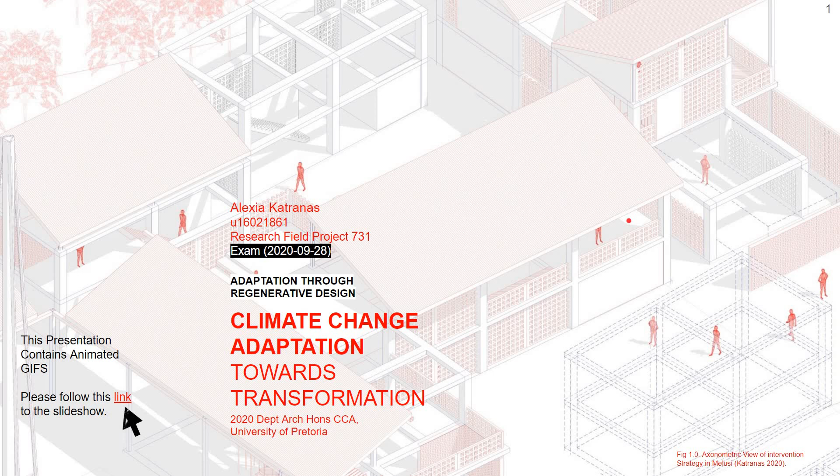I'm Alexia, and this project aims to interrogate whether architecture can serve the role of advocating agent, and thus catalyst, for transformation towards resilient systemic health and ultimately dignity in Melusi.

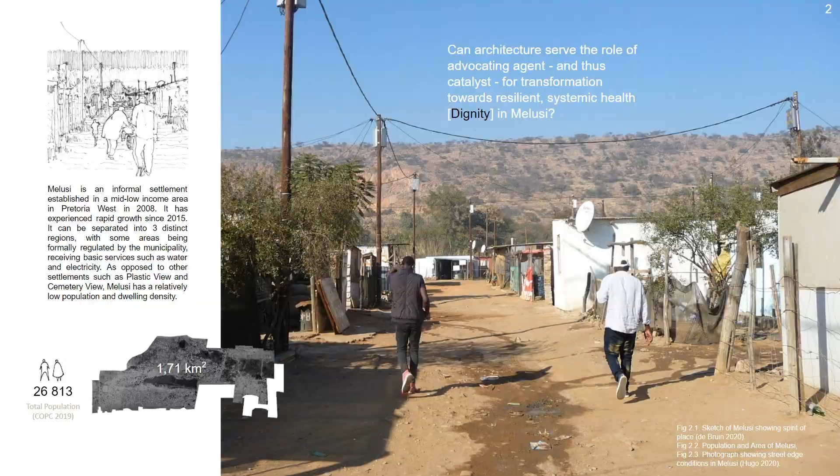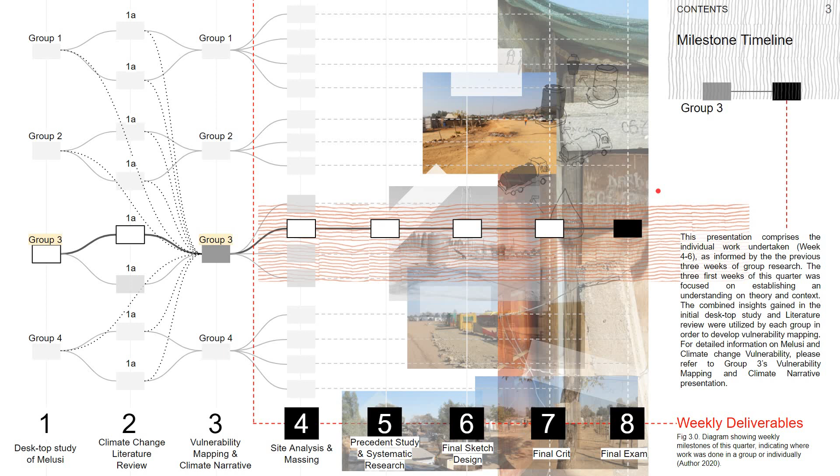This presentation comprises the individual work undertaken from week 4 to 6, as informed by the preceding 3 weeks of group research, of which I was in group 3. It is loosely structured as a narrative of the process undertaken, understood in terms of a theoretical framework, a contextual framework, the resulting spatial and systematic response, and the critical reflection.

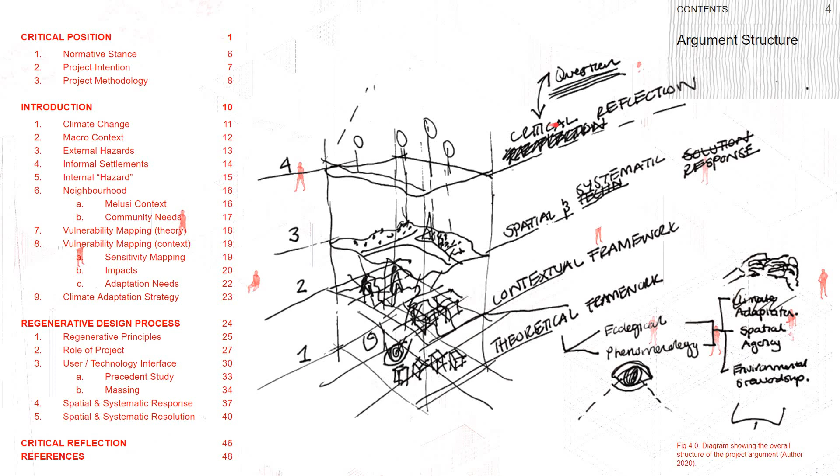The theoretical framework, first part, can be further split into the normative lens, such as an ecological or phenomenological paradigm, and the general knowledge or principles of climate change.

For now, we will begin with the critical position, which tells us that change begins with critically assessing how you see the world, in understanding your own role, and realizing that the importance of any system lies in its relationships, not our normative conceptions of static outcomes or objects.

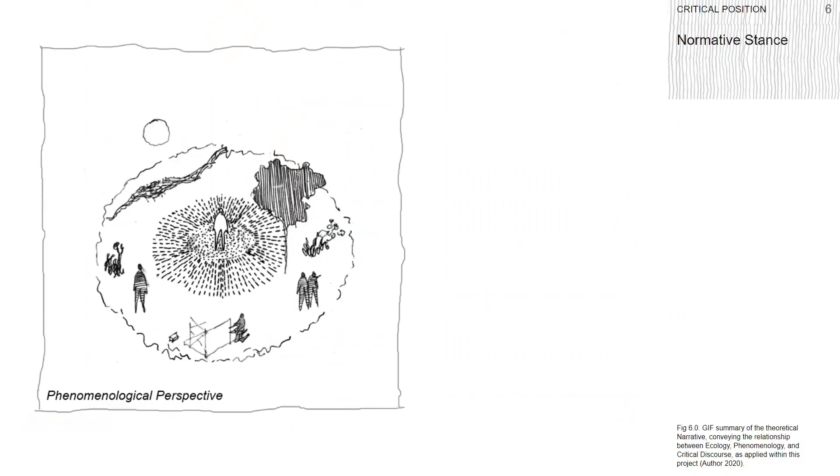In order to participate intentionally and beneficially, one needs to understand our living partnership with the world around us as relational and not transactional. This suggests that the way we should be approaching climate change problems is the same way we should be approaching so many other social and economic issues, as our fundamental conception of the relationship between what is inside versus what is outside of us, the other, is currently unhealthily fixated within the binary.

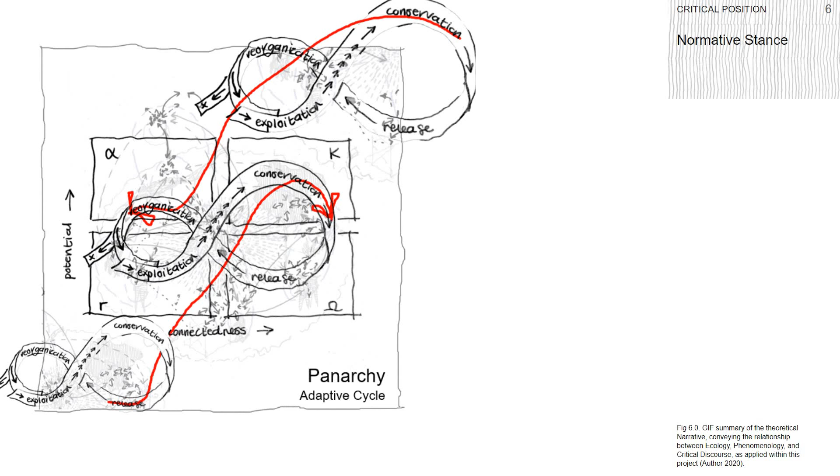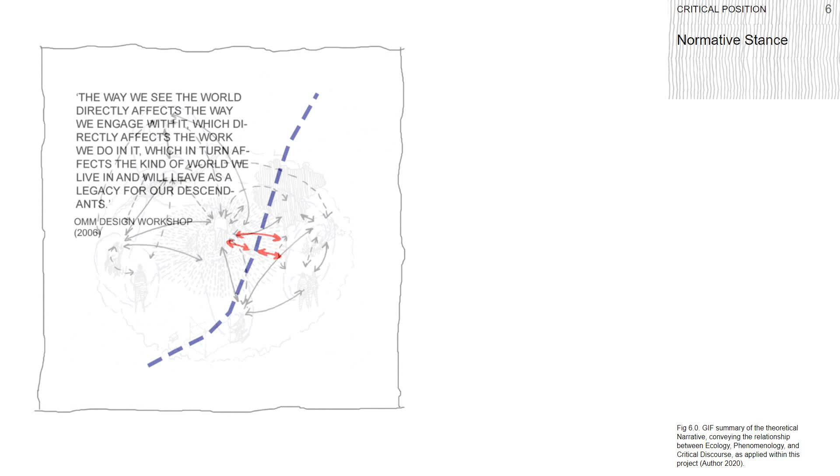Understanding place and its existing potential, whilst improving the value of existing systems, or manifesting, is a way to address climate change without imposing inappropriate technological systems in an effort to preserve current conditions against time's uncertainty.

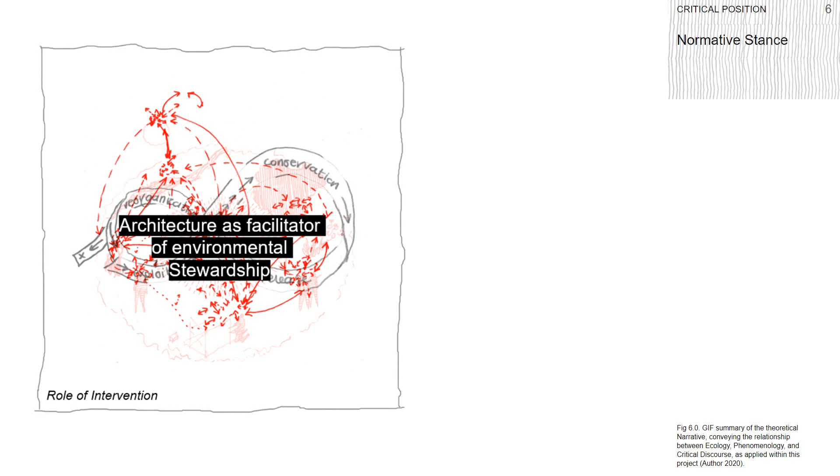This brings us full circle to how we see the world, and whether we impose change or strive to reconcile our relationship with it. In light of this, the intentions are as follows.

1. To explore climate change adaptation and regenerative design as a design generating method. 2. To showcase appropriate context-specific spatial and technological analysis and responses. And 3, to measure the potential of architecture as an advocating agent and catalyst for systemic transformation.

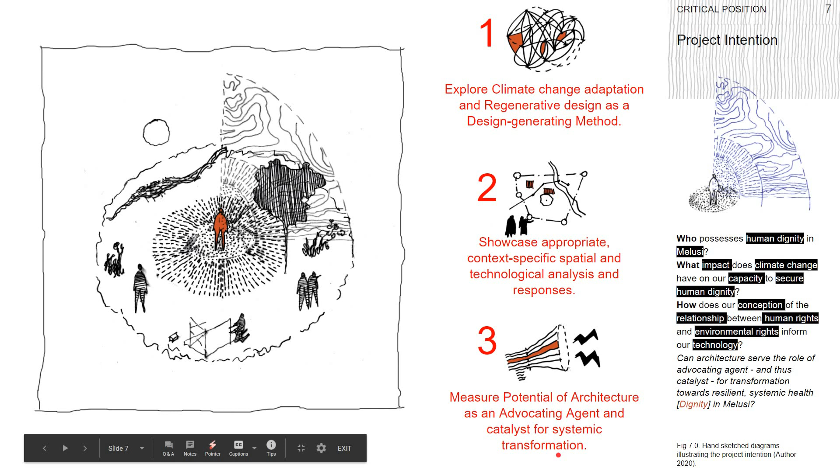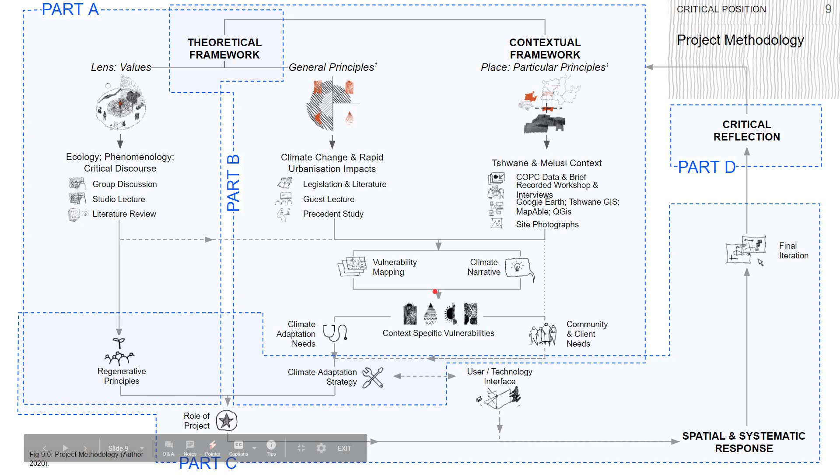In terms of methodology, the process, this following process was followed and will be further elaborated on during the remaining parts of the presentation, which is part B, C, and D.

In terms of part B, this section will introduce the remaining portion of the theoretical frameworks as well as the contextual frameworks, using this incremental sequence that was followed whilst undertaking the research.

The risks relating to climate change are as social as they are environmental, and essentially threaten our human dignity as well as other core human rights as upheld by our Constitution. This project will thus consider the important relationship between adaptation and human dignity going forward.

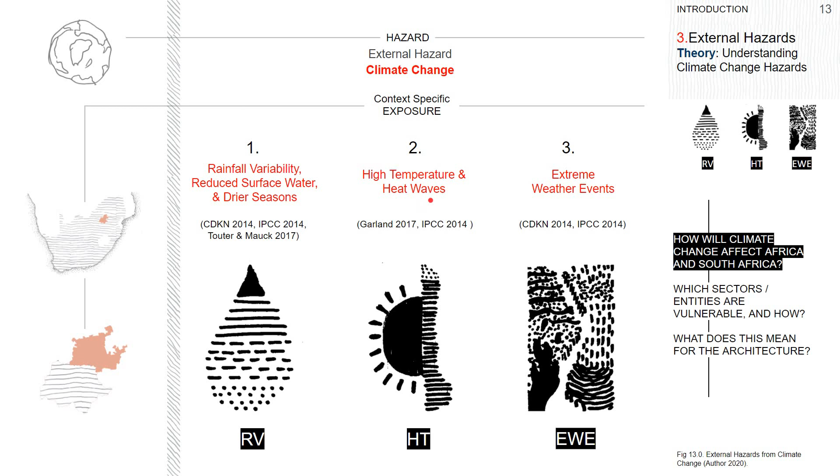It is also important to note that the research area, Melusi, is a sprawling informal neighborhood or settlement located to the west of Pretoria CBD in City of Tshwane Region 3. This exposes it to the climate hazards faced by Tshwane and the majority of South Africa, being rainfall variability, high temperatures, and extreme weather events.

Furthermore, Melusi is an informal settlement, and just as with other informal settlements studied within Pretoria this year, is undergoing rapid growth in light of increasing trends of urbanization.

Thus, informal settlements typically have a worrying social vulnerability index due to the existing infrastructural deficit. This is important because it increases Melusi's exposure to the identified climate change hazards previously mentioned, suggesting a need to provide basic infrastructure as part of climate adaptation measures.

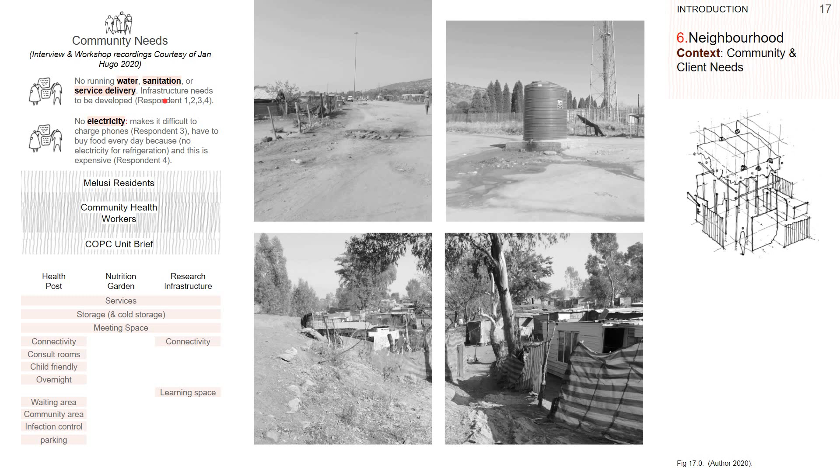It was then imperative that we undertook a vulnerability mapping exercise in order to understand the particular climate adaptation needs of Melusi.

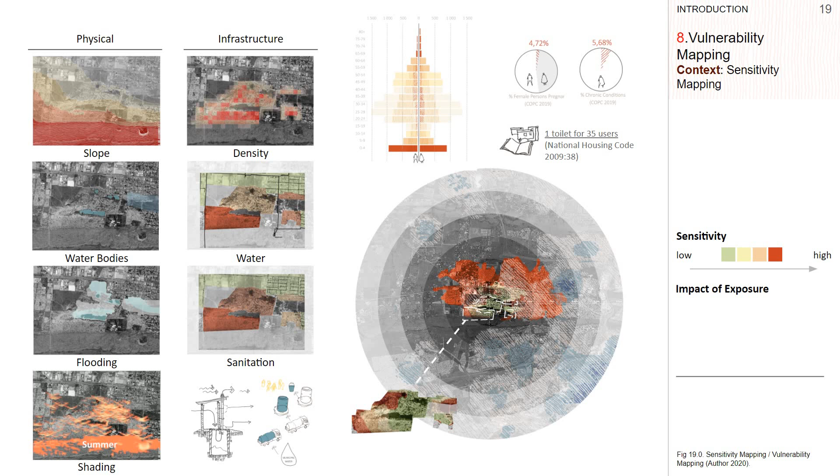This began with the group desktop mapping of existing sensitivities, which led to a greater understanding of the relationships between each sensitivity and impact. It also assisted in identifying existing leverage points that support successful contextual adaptation, the adaptive sensitivities.

This project will focus on addressing climate change sensitivity, human health issues, water shortage impacts, and infrastructural damage impacts by leveraging access to clean water, access to sanitation infrastructure, and healthcare through the provision of this infrastructure, but also its versatile and adaptive technology so that resilience can be fostered.

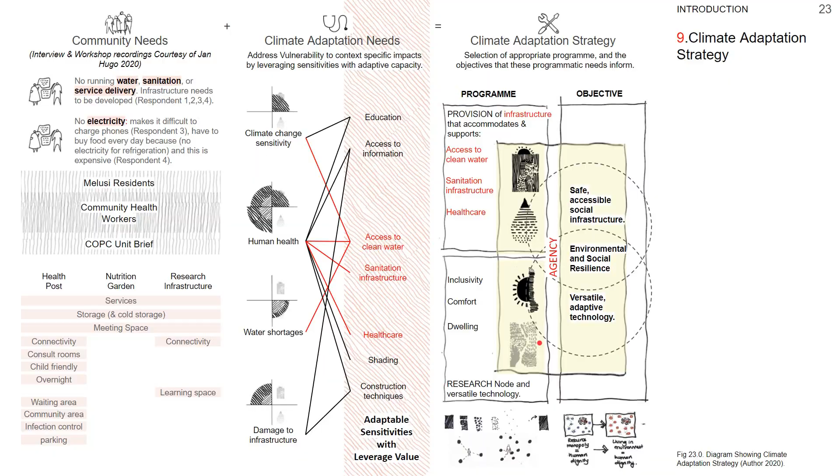Now, having identified the climate adaptation strategy out of the theoretical and contextual frameworks, this section, section C, will explore place on a site-specific scale in order to inform the role of the project and the user technology interface so that we may arrive at a spatial and systematic response.

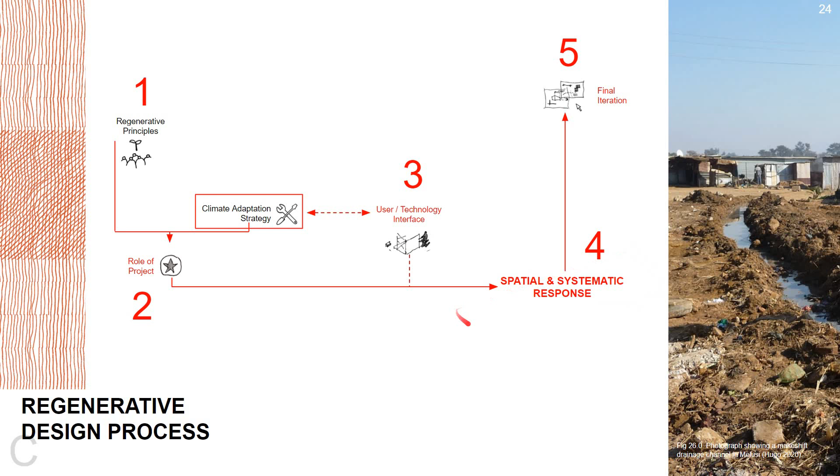This began with the site selection and analysis, which indicated a few things, specifically drainage issues due to deep dips in the topography and also it being at the foot of a ridge, the high velocity of rainwater surface runoff. It also indicated a need for additional shading, as well as an opportunity to define a more comfortable street edge condition. It's a very wide existing street.

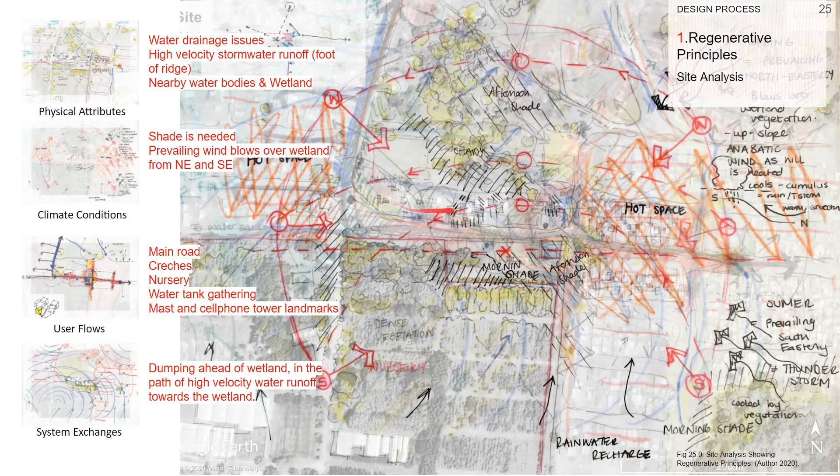The site sits on an important transport corridor for Melusi and thus serves a considerable portion of the people, specifically in terms of these more public programmed buildings over here, for example, the creches across the road.

Alongside interview data, which you can see over here, has informed the understanding of patterns of interaction, essence patterns told us that migration, informality, affordability, and simplicity are important patterns, as are community and unity. The essence pattern is defined or identified as stabilizing social network, this through the interview feedback, which indicated that people really support one another.

This supports the importance of architecture's role being that of a facilitator of systemic social change towards environmental stewardship, where architecture is the boundary condition or temporary nexus in the flow that reflects a positive ecological worldview.

In order to foster environmental stewardship, or to dwell, it is imperative that the response embodies the existing potential of Melusi. In order to catalyze systemic transformation, it is furthermore important that the architecture makes existing strong relational connections within Melusi visible.

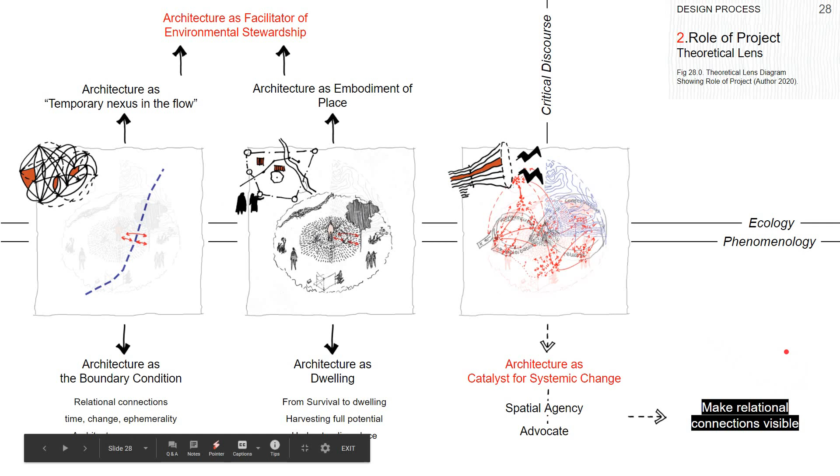This project thus has the opportunity to define a positive interface between the community needs, the clinic needs, and the climate adaptation needs, strengthened by a research and connectivity node.

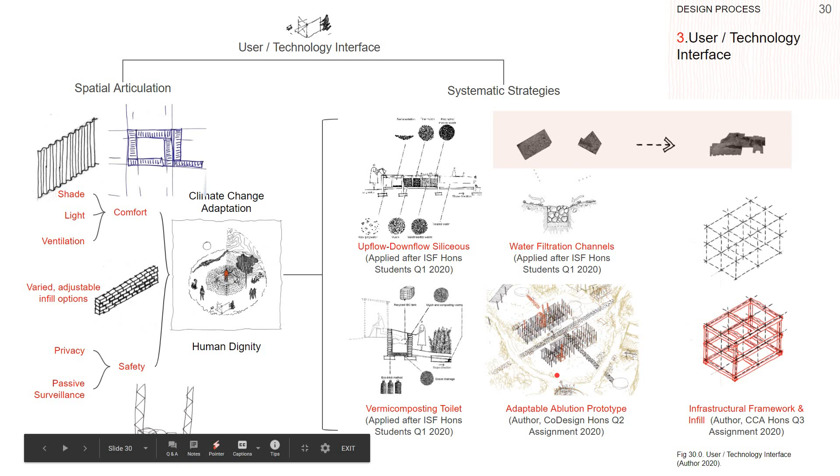There also exists the opportunity to apply strategies researched in quarter 1 and 2 within the context of Plastic View and Cemetery View that can be applied to Melusi.

In terms of sanitation, this would include the plugging in of vermicomposting sanitation approaches, which can be accommodated easily by the adaptable ablution prototype shown in this GIF that I worked on last quarter.

In terms of access to water, this would include rainwater collection, as well as grey water filtration using the upflow-downflow siliceous system, as well as introducing water filtration channels on the ground to mitigate existing drainage issues.

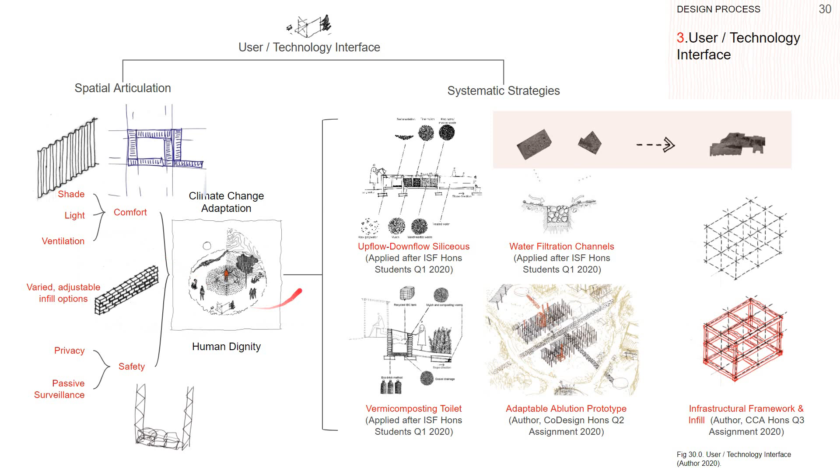It is also important to remember that in terms of climate change adaptation and human dignity, it's not only the provision of basic services that are important, but also the experience and the spatial conditions. So the approach also needs to take into consideration thermal comfort, as well as safety and belonging.

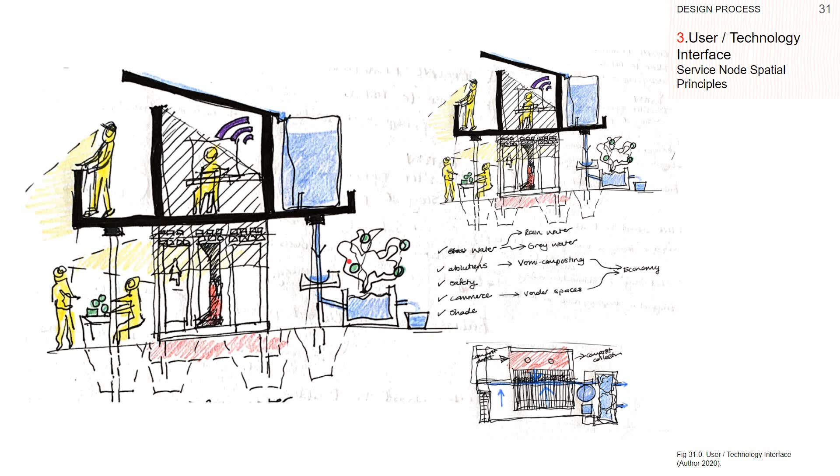Here's a preliminary spatial and systematic principle that was explored for a multi-service node.

In terms of further response to site conditions, an important consideration, once again, was the steep slopes, which will be made use of. It is suggested, furthermore, that an artificial wetland is implemented in this area as well to mitigate and slow down the surface runoff, which naturally collects there.

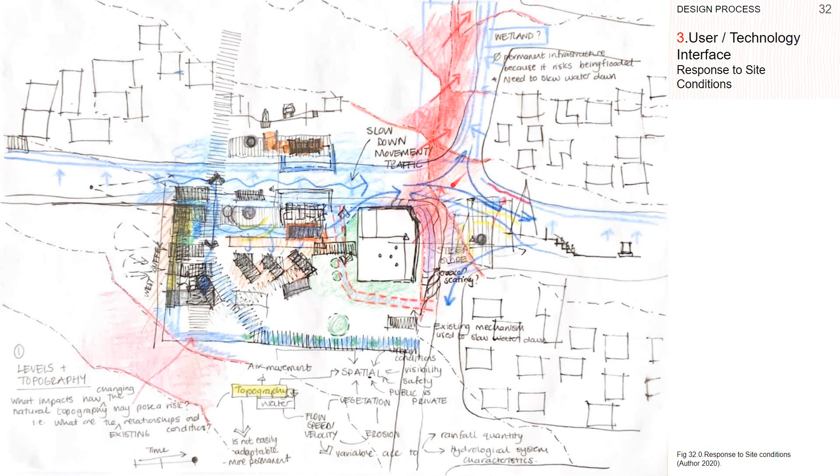In terms of a precedent study, Casahilo is a project which forms part of the Apan Housing Laboratory in Mexico, and it became a helpful construction informant because it also aims to facilitate incremental expansion through a modular framework and offers the opportunity for adaptable wall infill.

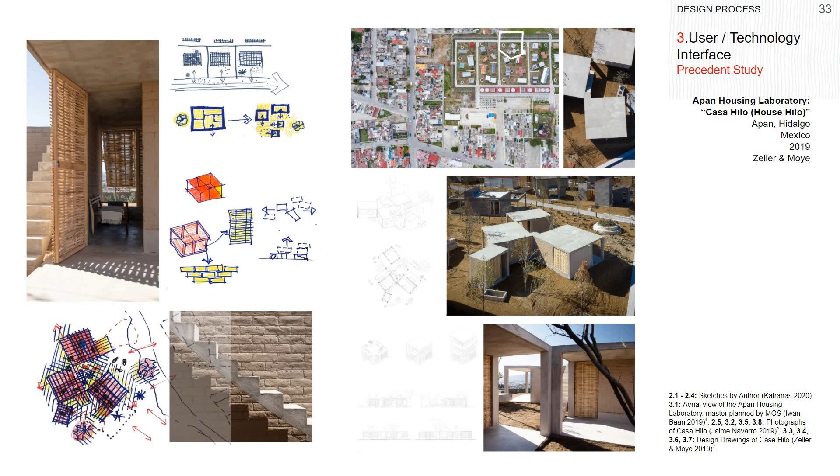Let's go to this next slide where we can see this is where the health node will sit, the research node, and the community node, which all function together in this way.

The ground floor accommodates the storage area, which will serve both the health node and the research node. The ground floor is the main community interface as well as the health services interface, and the first floor is the more private areas such as the

safe house or overnight areas, the breakaway areas for studying for the staff, as well as the area that houses the equipment for research that keeps it safe.

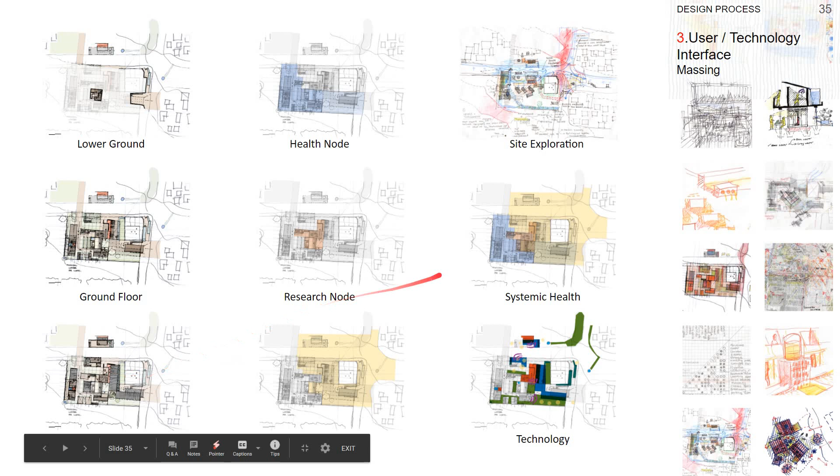Finally, we landed an exploration of the possible spatial and systematic response within the modular framework that was undertaken. Once again, these are actually the multi-service nodes that are being suggested, which can be explored at a later stage.

Important to note here is the fact that we have a community center that can be plugged in over here, and a shipping container that can be plugged in here, just like the existing health node.

The whole point of this is to provide shading as well as infrastructure to allow for easy adaptation and expansion, as well as accommodate healthy service provision.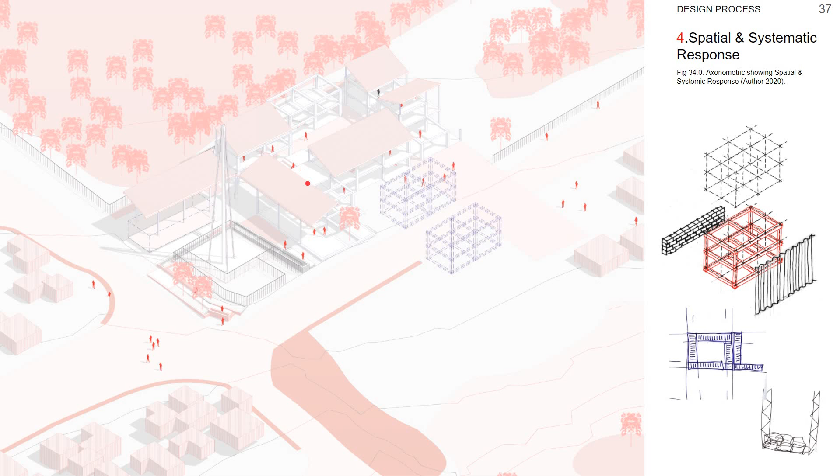Over here, once again, the health node, the research node, the community node, suggested wetland, and future transferable service nodes, with all of the access points over here, as well as an internal courtyard, which is a waiting area for

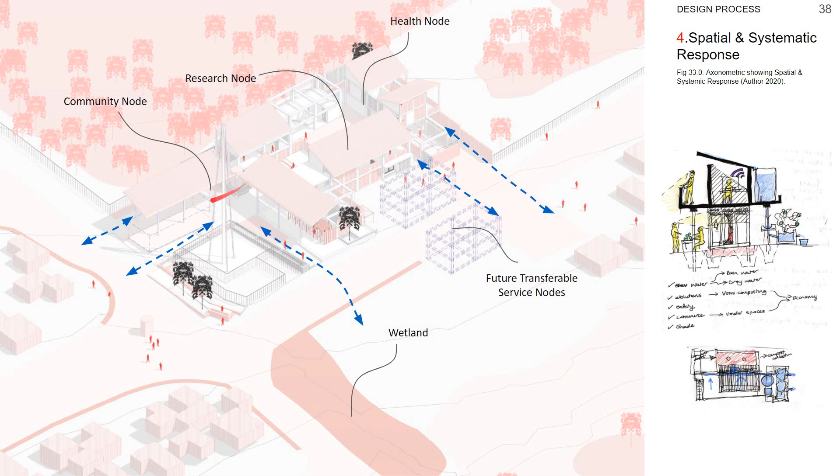the health node, and this area, which is pretty much a waiting area for the community node, where one can relax. And over here, obviously, the ablutions that plug in.

Once again, the upflow downflow siliceous approach to greywater filtration makes use of gravity and uses the slope to its advantage, where one can drop off their greywater and collect their filtered water on the side, which can help with the washing of buckets before water is filled at this municipal serviced water tank.

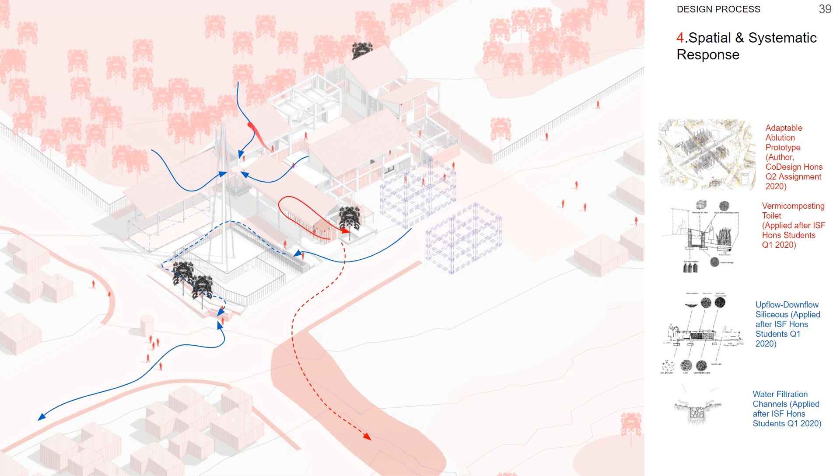Over here we have our greywater, our vermicomposting toilets, and once again trying our very best to allow for rainwater collection so that this node over here can function as hand washing for the ablutions, as well as the community center, as well as this area here for the staff and the community.

So once again, one can enter here for the health node. This is your community health center, which plugs into this more permanent infrastructure, which provides sanitation and water.

This is a more emergency area here that can be accessed directly, and this is another more intimate waiting area. This is multi-purpose, can be used for the social workers, for the maternity consultations, and this is actually your

reception area. This area over here is your research node, which is very important that it is placed in this interface with the community as well as with the vermicomposting, because it's important that that is closely monitored for health reasons.

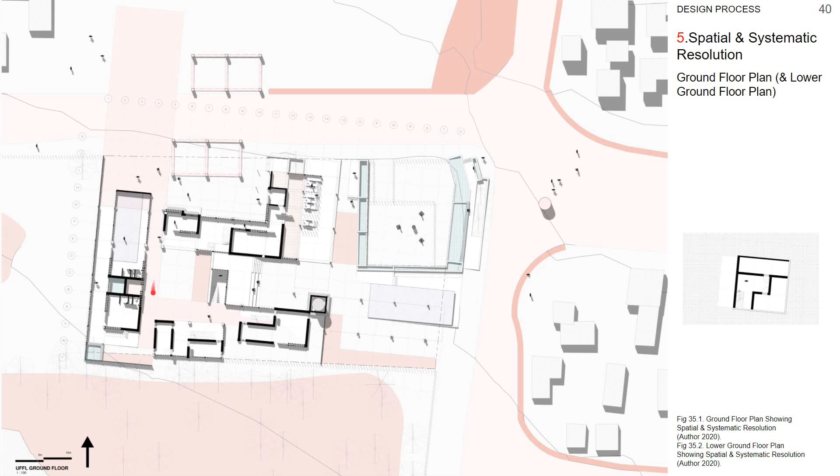And this is a breakaway space for the medical staff or the community health workers, where there is a kitchen where they can leave their things, and also with an access route which makes access quite easy and access to the storage quite easy as well.

Then on the second floor, once again, this is the safe house / overnight. This is the floor above where the research node is.

This is where the research equipment will be kept, and this is an area for the community health workers to come and have some quiet reading, studying time.

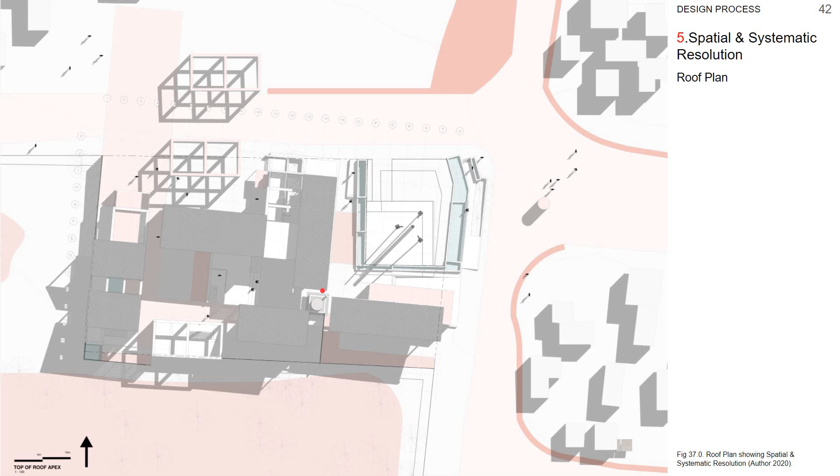Finally, overall, in terms of critical reflection, the spatial and systematic framework yielded from this project has resulted in exciting and generous spatial qualities as it wishes to facilitate dignity, which transcends just human needs, basic needs.

At this point, I believe that perhaps the contextual appropriateness of the steel and concrete used within the more permanent framework infrastructure can perhaps be further questioned going into the next quarter.

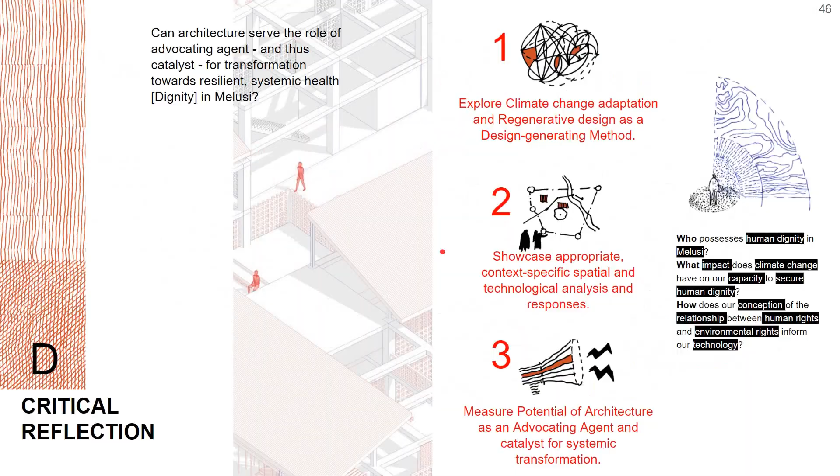But all in all, the most successful aspect of this project is perhaps its role as an advocate, because the process has definitely impacted on my own understanding of the world around me, and thus my own approach as an architect. So for this reason, I believe there's much potential in continuing the exploration of architecture and advocacy into the next quarter. Thank you.